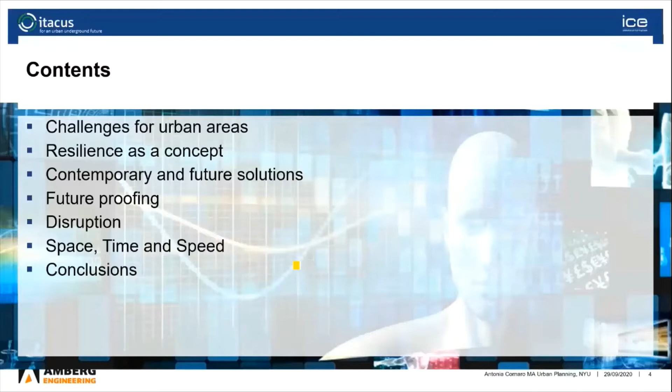Our challenges for urban areas are manifold. Growing populations and migration into cities cause an increase of threatened people in case of disasters. Increasing natural disasters and effects of climate change are really the new reality. So cities are facing challenges to get prepared. They need to deal with shocks and stresses and be able to bounce back.

Future-proofing is a concept that affects our infrastructure and how we will operate in the future. With the integration of underground spaces in cities' development plans, our cities have a chance to become more resilient, and to really avoid, reduce, or at least adapt to stresses and shocks.

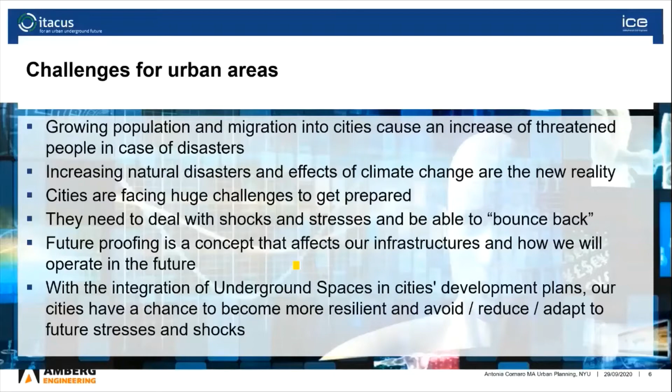So when we look at floods and heavy rainfall and its significant effects on our cities, why is that? Well, city surfaces have been hardened. We've paved them all over, as this really serves the primary purpose of our city life, namely mobility. This has a huge impact in terms of diminishing the natural infiltration of rainwater.

So, for instance, the rainwater then goes into our sewer systems, but when we have heavy rainfall, this leads to overstretching of the sewer systems and their capacities and the water treatment plants. Secondly, the lack of natural infiltration may lead to groundwater tables lowering and soils drying out.

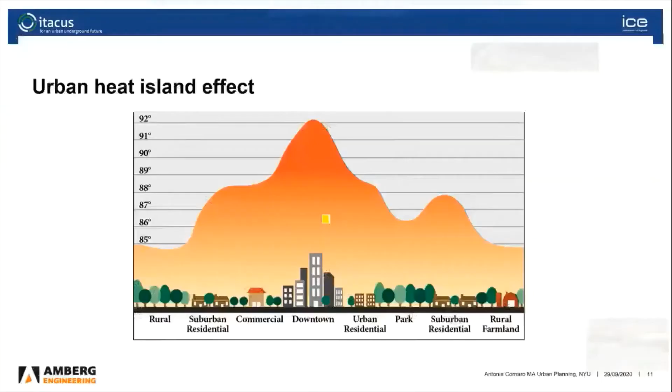So that's really the core of my presentation, that we need to consider the Sustainable Development Goal of the United Nations, which is sustainable cities and communities. How do we reach this? How do we create resilient cities? How do we create smart cities? How do we create sustainable cities? And above all, we want livable cities.

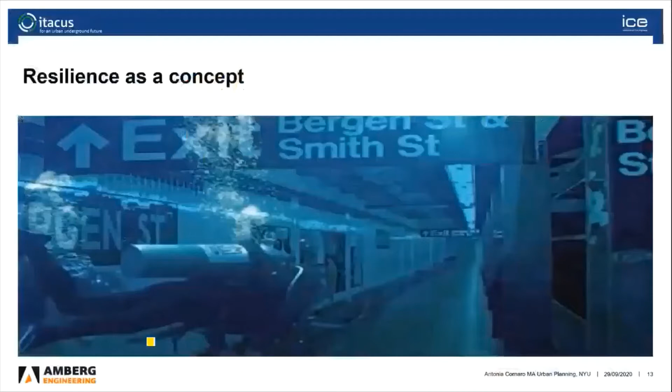So I will say a little bit about resilience as a concept. Resilience is really the capacity of individuals, communities, and systems to survive, adapt, and grow in the face of stress and shocks, and even transform when conditions require it.

So building urban resilience requires looking at a city holistically, understanding the systems that make up the city and the interdependencies and risks they may face. So at any given moment, more people than ever before are being threatened by local events like storms, rainfall, or enduring heat waves. And we need to see how we can deal with that from an urban development perspective.

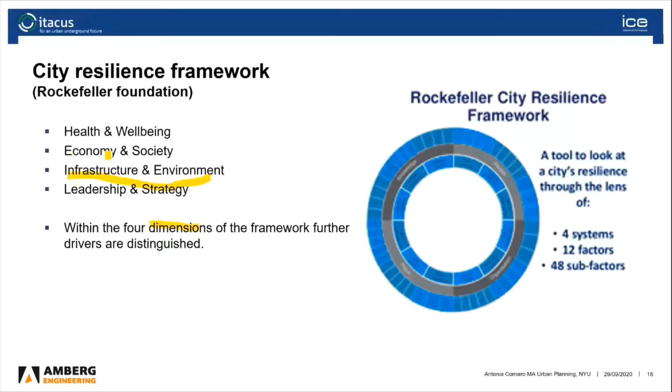So the Rockefeller Foundation has defined the city resilience framework as having four dimensions of the framework with further drivers. And we are really looking at the one on infrastructure and environment today, which affects our industry, of course, the most. But the others are also important factors in this framework.

So this is really something that can be broken down into chronic stresses and acute shocks. Chronic stresses are really slow-moving disasters that weaken the fabric of a city. And acute shocks are sudden, sharp events that threaten a city. Those are the ones we speak of in this presentation.

I just want to give some examples of how cities are dealing with getting rid of the heavy overpaving of their urban cities and transforming some urban corridors into green spaces. So this is, for instance, the Seoul city government has unveiled this plan to build a gigantic linear park on the city side of the country's oldest highway, which will be turned into an underground roadway. It will stretch almost 8 kilometers, and it's currently being designed and prepared for implementation. This will be, of course, an immense asset to the city of Seoul.

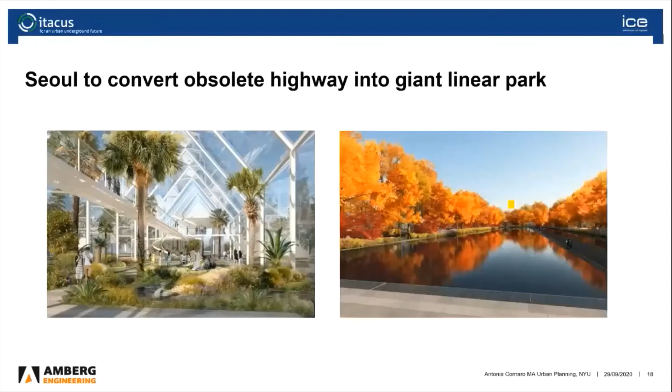We have several examples of cities that are taking down obsolete urban highway structures, like here in Seattle, the old Alaskan Way Viaduct with a double-deck roadway completely delineating the city center from the urban waterfront. And this is the situation now with the bored tunnel underneath and opening the space for greenery and pedestrians.

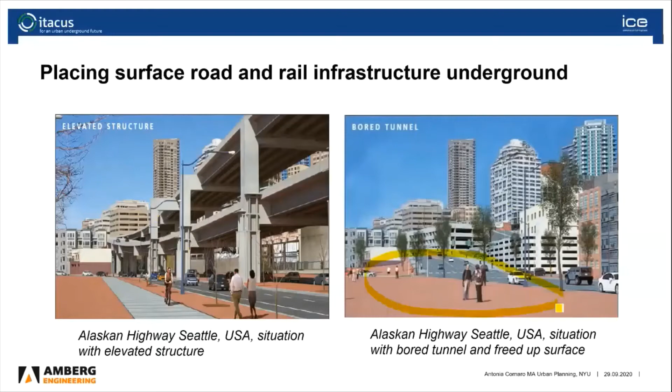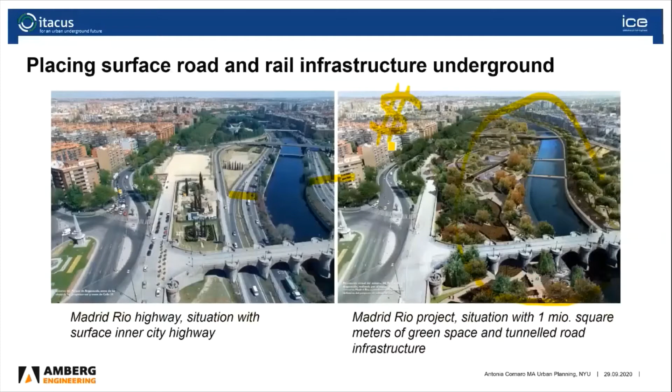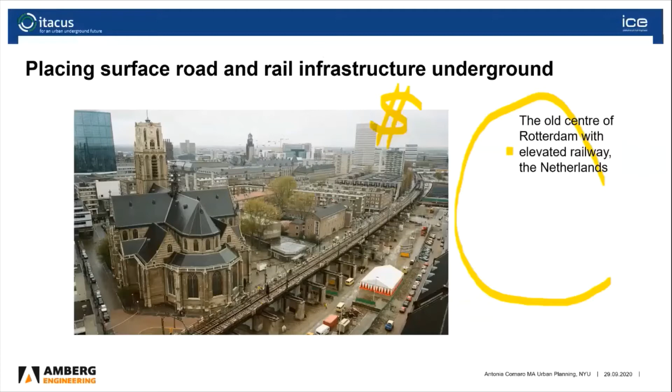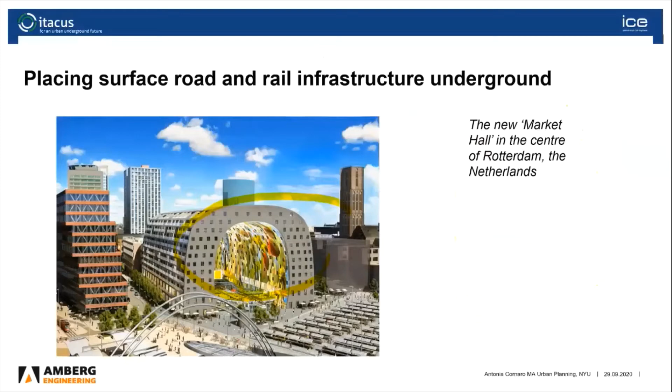So we want to say a little bit about how the subsurface can also threaten us. The subsurface can play two roles in urban resilience. The first is that of a possible stressor, so beneath the surface there could be processes acting that threaten the surface over time, for example sinkholes. A deeper knowledge of geology helps to counteract here. Secondly, the use of underground space could help alleviate some of the stresses acting on the city and play a role in urban resilience in the aftermath of an event. I will show you examples of that.

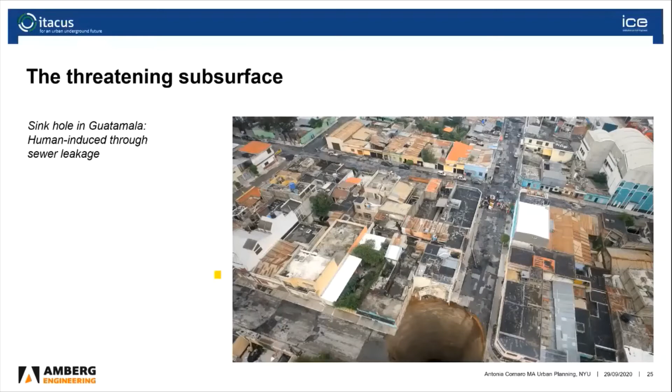This is an example of the threatening subsurface. The biggest threat of how the subsurface can be a liability for the city is earthquakes. These are natural phenomena, but human interventions can also cause artificial earthquakes, or sinkholes, often caused through the collapse of old mine galleries or shafts. Data is often not available on whether a threat exists or not. Also, when we extract resources from the subsurface, that can cause issues—for instance, in the Netherlands, artificial earthquakes were caused by gas extraction, and houses were damaged and fell down.

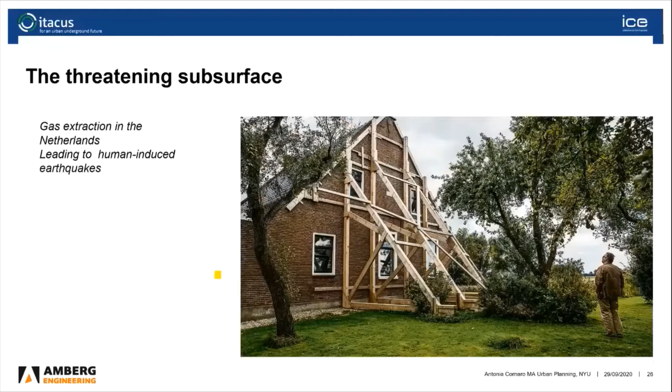The third one is contamination, brownfield contamination, which can seep into groundwater and aquifers. Processes below the surface really have a different time scale from life at the surface. It can take many years for brownfield pollution to actually reach the groundwater. Once it does, the possibility of contamination and its effect on drinking water supplies could be enormous. It is human interventions in the past that were never documented that raise concerns. Preventing those stresses from occurring, or being prepared for them, requires an extensive understanding of urban geology, human interventions, and existing physical constructions.

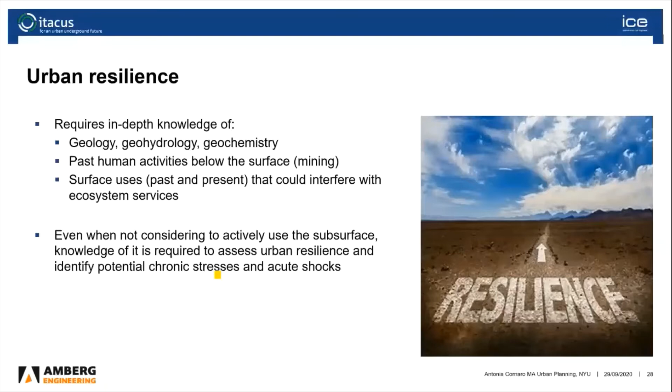So how do we meet the challenges of using underground space? You can give your opinion on the poll while I continue with my presentation.

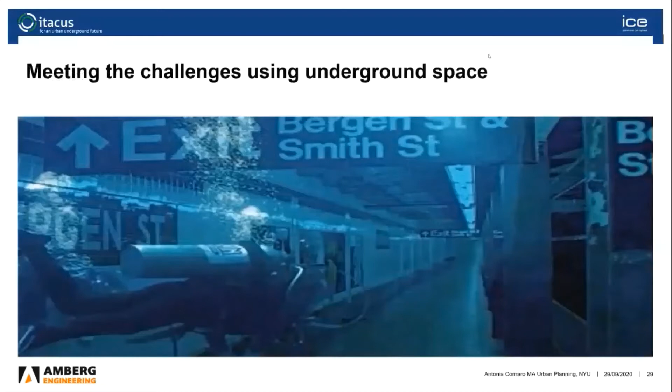For instance, in Japan, studies have already been carried out on how to utilize underground spaces and how they could protect against earthquakes, as far back as the 1930s. The enclosed properties of underground spaces provide protection against earthquakes and can be used to enhance resilience. Historically, large diameter underground tunnels have suffered less damage than surface structures during earthquakes, and this has been proven over and over. I have seen live footage myself from an earthquake in Santiago, Chile, where the metro system was only minorly shaken, whereas on the surface the earthquake was causing major destruction.

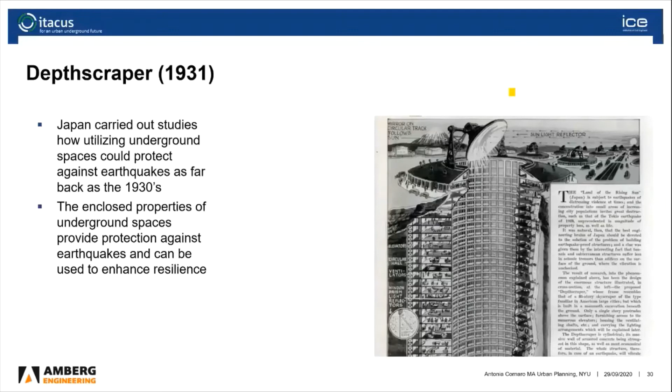So how about what the UN Office for Disaster Risk Reduction says in that sense? They say the use of underground space as part of DRR measures can involve designing large-scale underground spaces, e.g. car parks, tunnels, etc., so they can serve a variety of disaster risk reduction functions. They name, for instance, temporary water retention basins in terms of floods, or as refuges, while also providing efficient access for servicing dense urban building blocks with water, energy, or waste removal services.

And I see here some of you have already taken the poll—45% agree, 28% strongly agree with that statement, that underground space can in fact enhance resilience or provide opportunities to strengthen the city's resilience.

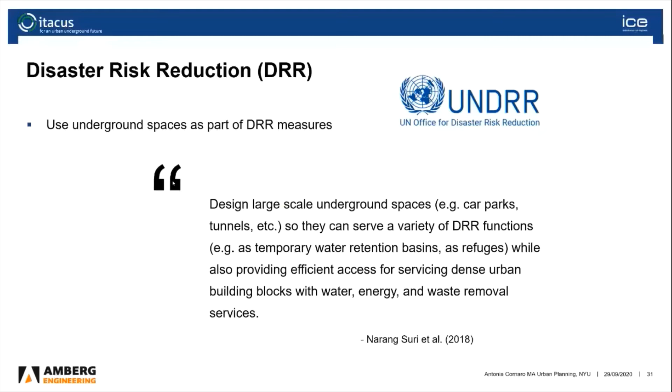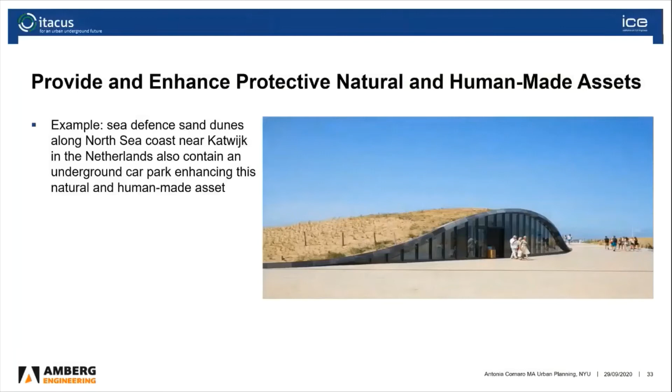We have other examples where we can enhance resilience by providing and enhancing protective natural and human-made assets. For instance, the sea defense sand dunes along the North Sea coast in the Netherlands also contain an underground car park, enhancing this natural and human-made asset. You see a picture of how that looks here.

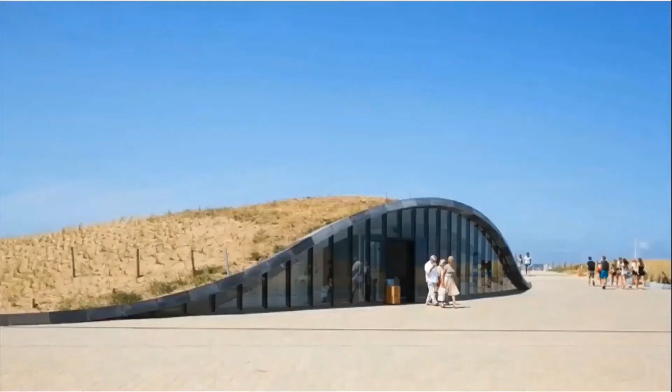The Netherlands, being a very low-lying country, has a lot of regions or land masses that actually lie below the water table. They have always had very strong sea defense structures, and the dunes are a major natural occurrence that helps them deal with water ingress in heavy storms or agitated sea times. These dunes are artificially created, but also used as underground car parks. That is really a dual function being done in a very clever way.

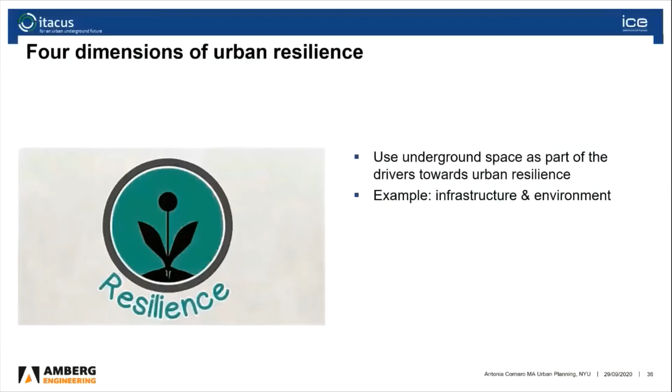So the use of underground space as part of the drivers towards urban resilience - we have seen examples in infrastructure environment. These are the three avenues this can take. I've shown examples in the first one just now with the dune. Then we can also ensure continuity of critical services, and provide reliable communication and mobility.

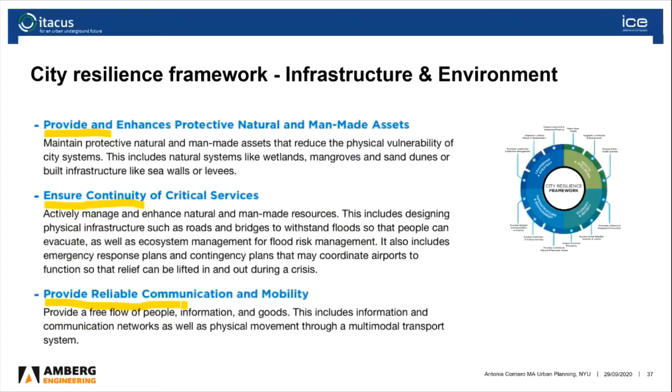So how do you ensure continuity of critical services when the threat of climate change has happened and it's more frequent, for instance highly intensive precipitation? Well, this poses a problem for cities without urban drainage. But for cities that have drainage systems, the capacity is often such that not all rainfall runoff can be dealt with, and that results in flooding.

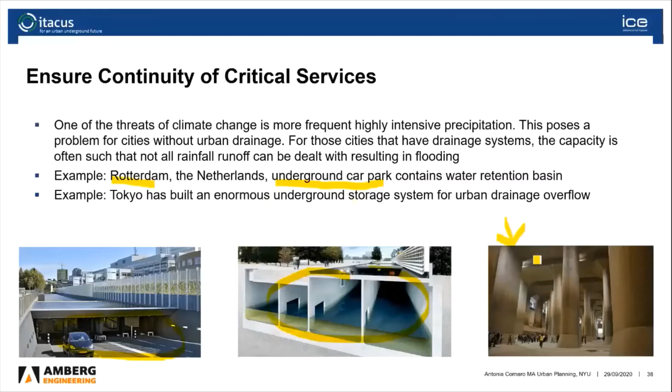How do we provide reliable communication and mobility in such times? Well, the extensive use of the subsurface for pipelines and communication cables ensures the continuity of communications and vital supplies, irrespective of the circumstances above ground. Being below the surface makes these systems independent from exogenic forces like storms.

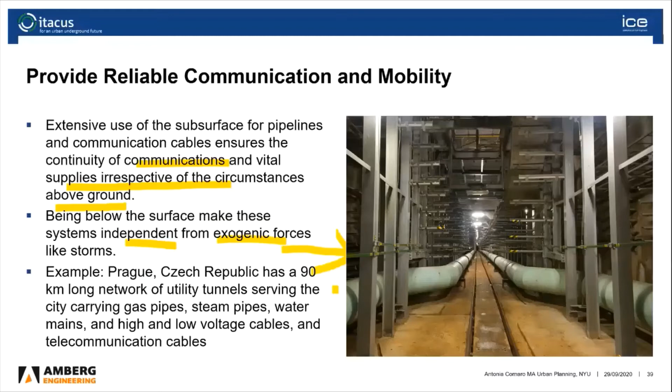Here we have an example: the city of Prague has a 90-kilometer-long network of utility tunnels serving the city, carrying gas pipes, steam pipes, water mains, and high and low voltage cables, as well as telecommunication cables. This is what that looks like. We can imagine how vital that is in a major disaster if this keeps functioning.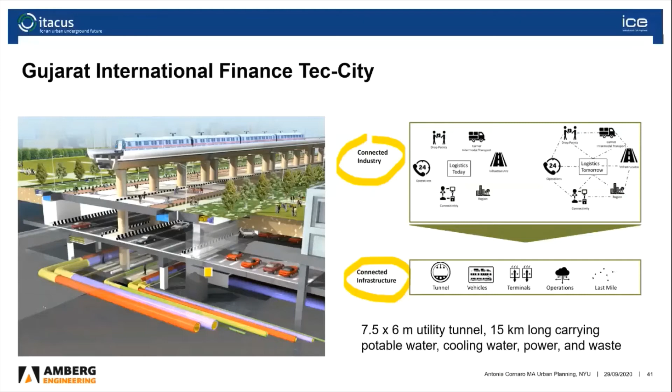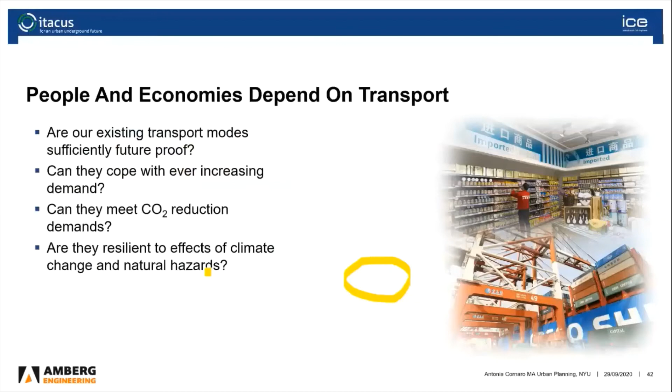So when we look at people and economies and how they depend on transport, we need to ask ourselves: are our existing transport modes sufficiently future-proof? Can they cope with ever-increasing demand? Can they meet CO2 reduction demands? And are they resilient to the effects of climate change and natural hazards?

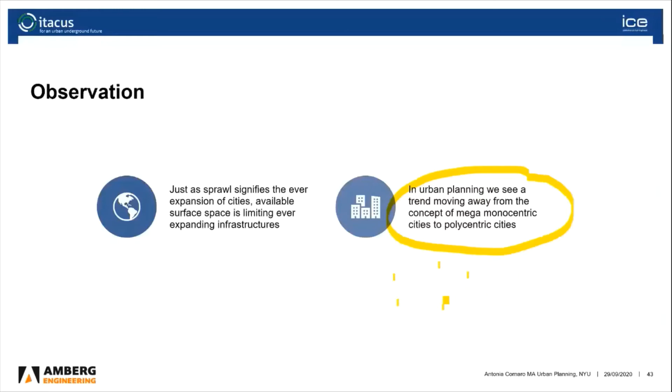Just as sprawl signifies the ever-expansion of cities, available surface space is limiting ever-expanding infrastructures. So in urban planning, we see a trend moving away from the concept of mega monocentric cities to polycentric cities - having a lot of different cities with the same kind of weight or strength, distributing resources and people rather than having it all in one major center. But no matter the current situation, there's an ever-growing demand for transport of people and goods, and I think we can all experience that.

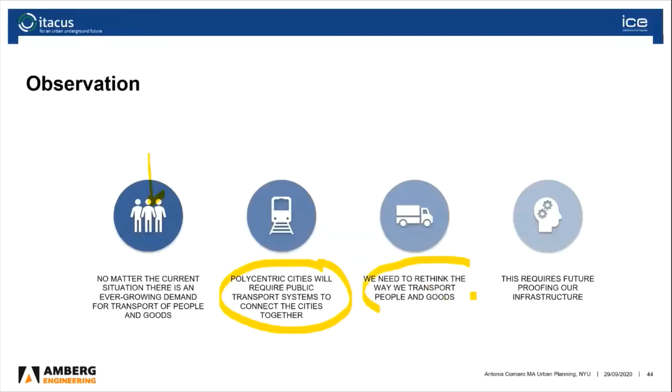Polycentric cities will require public transport systems to connect the cities together. We really need to rethink the way we transport people and goods, and this requires future-proofing of our infrastructure.

What are our contemporary solutions and how do we deal with this? Well, we always strive for more speed, so we see a big increase in high-speed rail networks all over the world. And we always strive to add more capacity - we expand our existing infrastructure and we add intelligence.

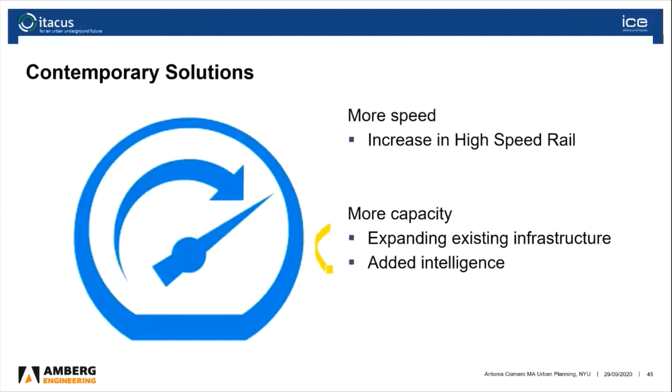Quick look at the railway map of China, showing the massive, dense, vast high-speed rail network and the bullet trains that are famous throughout that region, but also in Japan and other Southeast Asian nations. Hong Kong has major terminals serving these regions with amazing high-speed rail connections, transporting ever more people at ever higher speeds.

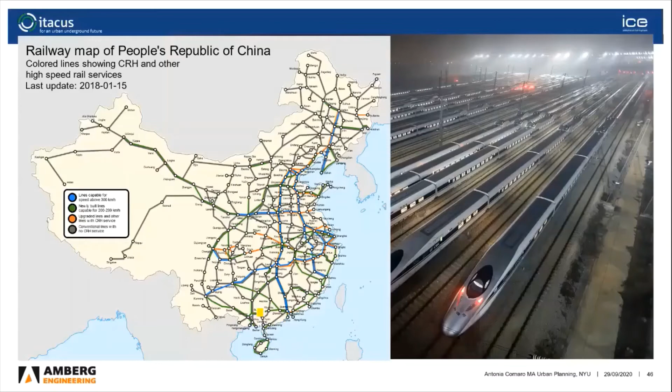In Europe there's similar networks, I would say, where, for instance, France or Spain have very advanced, fast, high-speed rail networks connecting the various polycentric centers and urban populations.

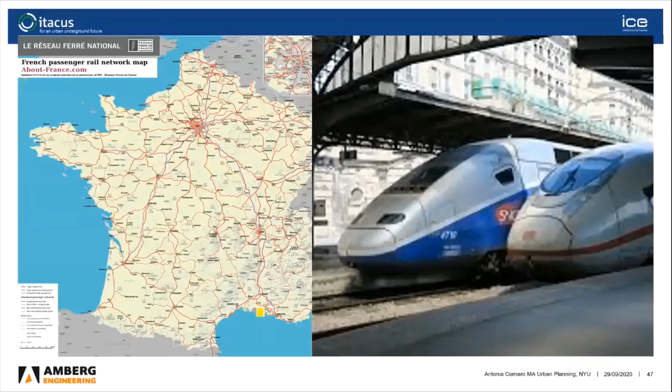But we are also looking at more capacity and additional space within our spatial boundaries in general. We're widening our road spaces to the max, and we're reducing the vertical separation minima to the max. In fact, we're doubling the capacity of airways.

I think this is a bit of an exception now with COVID-19, where we see empty skies, and we're not at full capacity at all. But in all the years leading up to now, not a slot was wasted pretty much, and the increase in air travel was constant.

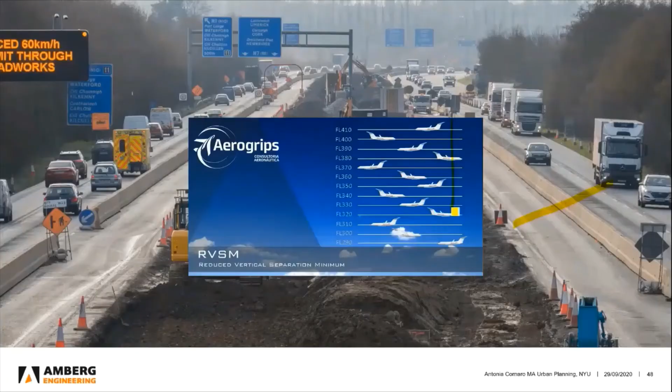But what did Albert Einstein say about solving problems? Well, we can't solve problems by using the same kind of thinking we used when we created them. We're squeezing the last drops from our infrastructures and contemporary transport modes without looking for new lemons.

What can be future solutions? Well, disruption is showing the way forward, and underground space has the expansion potential, as it is yet relatively underused. We have one contemporary system that conceptually shows us new avenues to explore and develop.

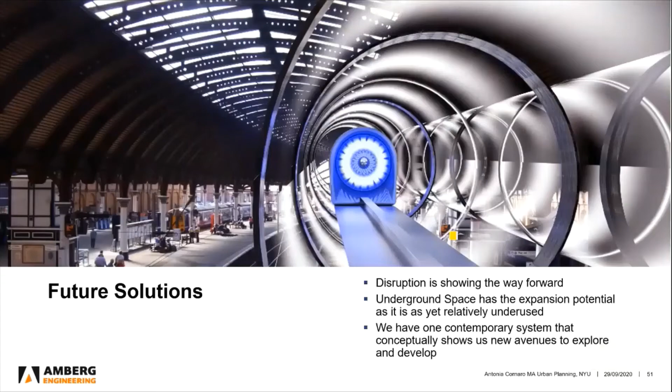When we look at, for instance, new market disruption, Uber or Tesla, there's a move away from private car ownership to shared and on-demand ownership, to electric vehicles, to automated and autonomous vehicles—meaning will we need so much parking in the future?

Hyperloop, ultra-high-speed transport of people and goods, allowing for larger regional dispersion and polycentric cities. And cargo sous terrain, the development of an underground cargo moving system in Switzerland, which I will say a few words about in a minute.

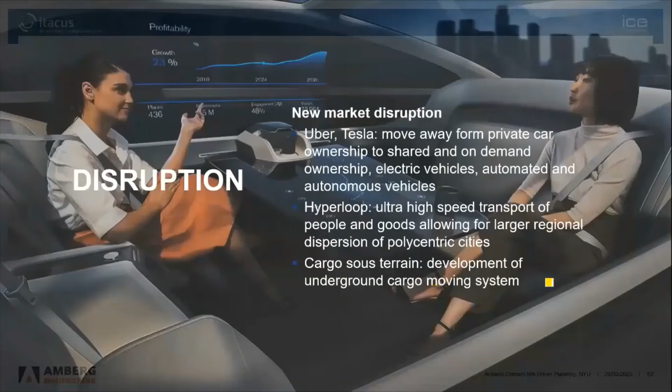So what can we say about disruption? Well, low-end disruption would be in our case that we have mixed-use systems, that we utilize the underground transport systems for both people and goods, that we don't create monostructures that only serve one purpose.

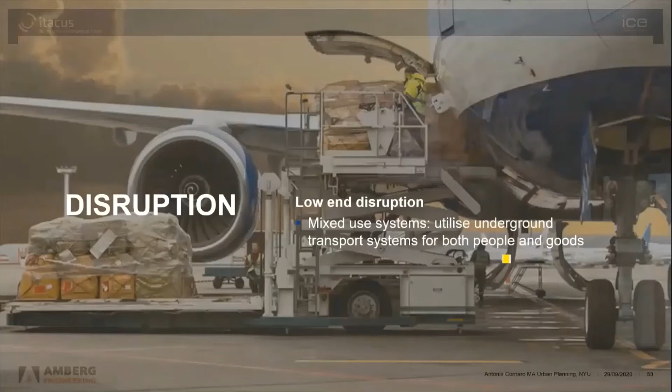So the use of underground space in terms of contemporary and future infrastructure requires space. But we are rapidly running out of surface space, and we need to keep our cities livable. We cannot use every last bit of public space for new infrastructures. Underground space offers a lot of advantages in that sense.

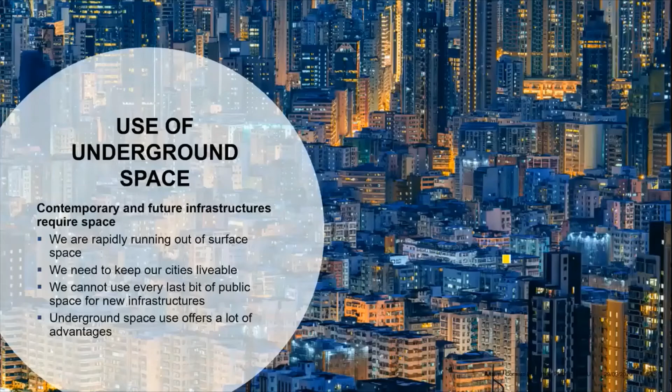It is easier to create unhindered and direct connections. It has no surface impact on communities, no environmental impact on the surface, rapid development of a new layer of supplemental infrastructure is possible, and it allows new combinations that serve the modern needs of the city and combine disruptive developments.

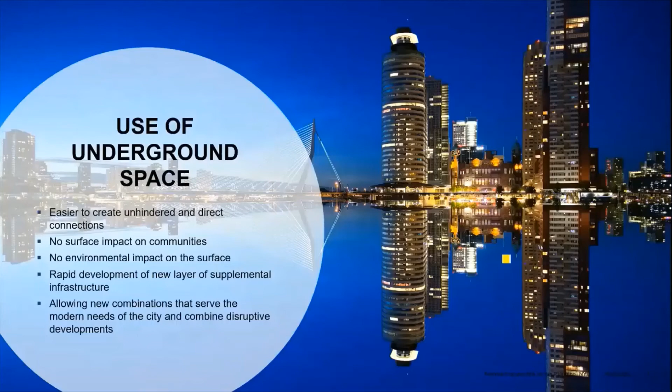So new systems will not replace the old systems. That is my observation. There will be no cutoff, no immediate transition. Old and new will need to exist next to each other. New systems will supplement at first and replace later. And this requires additional space in already densely populated urban areas.

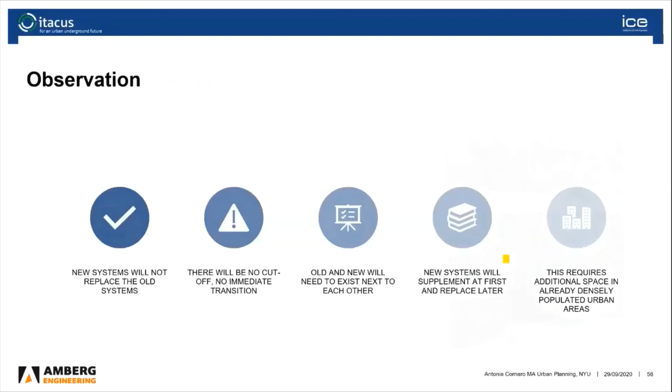Let's look at the tunnel concepts. I believe many of you might be from the industry where we design and manage and construct underground structures. Tunnels have a long history. They come in all shapes and sizes. They have been traditionally created for transport, for sewers, and for pipelines. Usually they have one thing in common: they are mono-use.

But what if we could harness the tunnel concept and future-proof it? The power of what if? What if we could come up with a mixed-use tunnel concept rather than the mono-use contemporary use?

And you're now being asked the second polling question: do you think it is likely that more tunnel systems will be multi-use in the future, and thereby contributing to a smart and sustainable city? See, I can vote as well, that's fun.

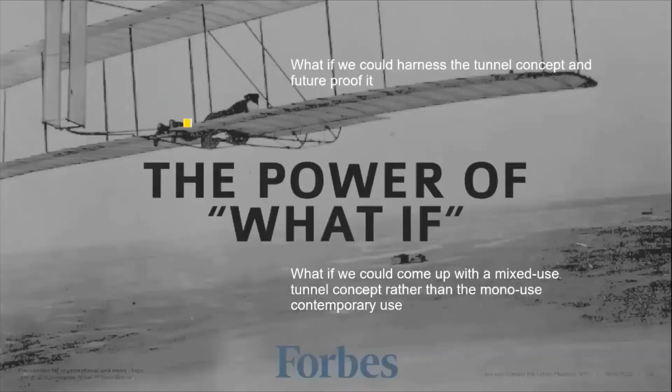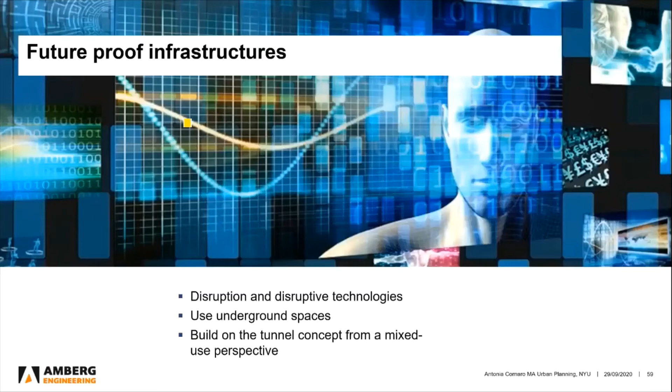And I carry on talking about future-proof infrastructures—disruption and disruptive technologies, the use of underground spaces, and building on the tunnel concept from a mixed-use perspective. For instance, in our book, we deal with that in chapter 10, how disruption is creating new paradigms for an urban underground future. Space, time, and speed, all three are of essence if we are to achieve the much needed disruptions and paradigm shifts that will challenge our conception of where we live, where we work, and how we travel.

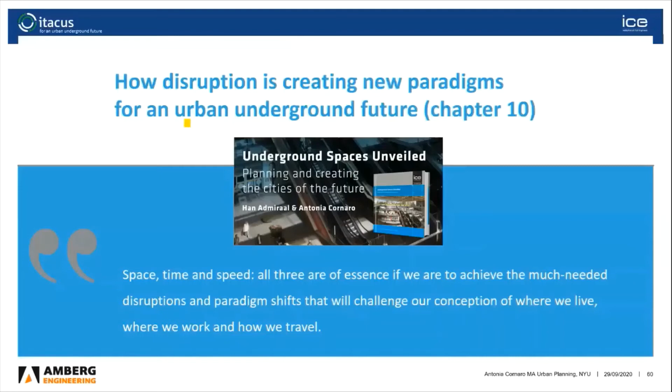And I would say disruption is here to stay. What is disruption? Well, this graph shows it very well. Innovation is doing the same things a little bit better. Then we do new things. And then we have disruption, making things that make the old things obsolete eventually.

And I see you have been polling here. 35% of you think it's very likely that this will happen, and 33% think it's likely. You're still submitting your choices. There's also 10% of you who think it's unlikely that we will use the underground structures for multi-use purposes.

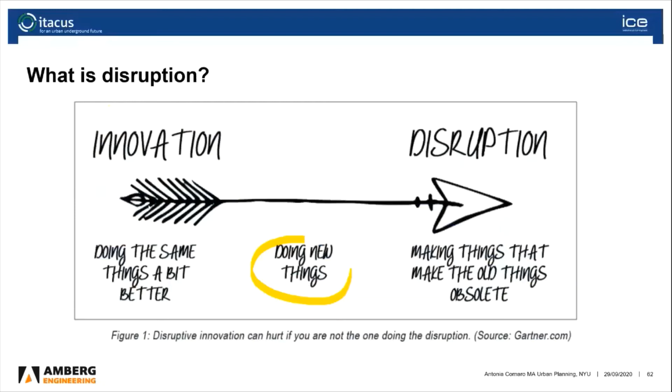Examples of disruptions are, for instance, PayPal challenging banks, Apple credit cards challenging existing credit card companies, Uber challenging the taxi business, Airbnb challenging the hotel business, Hyperloop challenging contemporary transport, and mobility as a service challenging private car ownership. The victims here are really the established companies, caught like rabbits in the headlights of the aggregator companies. Aggregators use new technologies to shift to a new paradigm on accommodation, for instance, or mobility, which is our core topic. The aggregators are disruptive, and the disruption itself is causing a transition to what will inevitably become the new normal.

So disruptions hurt and challenge the common way of doing things, and new paradigms will come into existence through disruption that shape the way forward to the future.

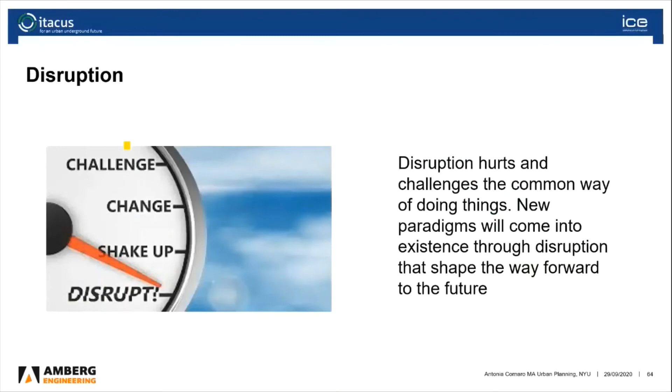How do we bridge space, time, and speed in the future? Can we look at urban density through satellite cities? Well, two-thirds of the population will live in cities by 2050. That's a staggering number. Most of these cities are in coastal regions prone to permanent flooding due to climate change. Can we halt the migration to cities by creating density through connected satellite cities in what are now emptying rural areas? What if we could travel 1,200 kilometers a day in 60 minutes?

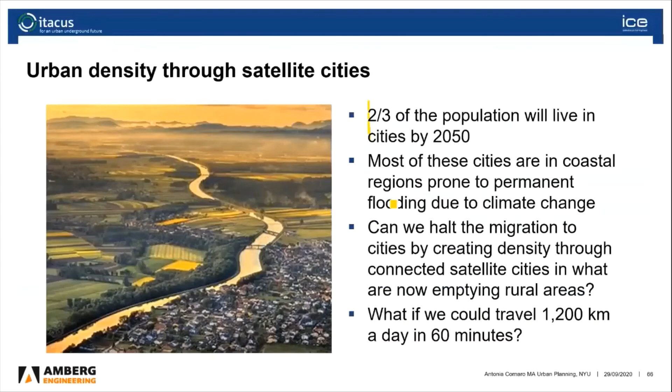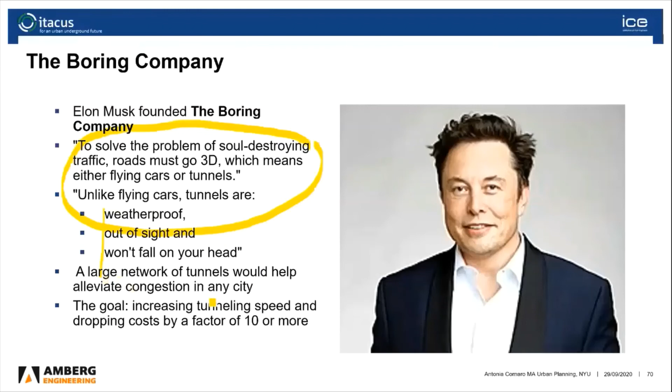And what he said is, to solve the problem of soul-destroying traffic, roads must go 3D, which means either flying cars or tunnels. But he says, unlike flying cars, tunnels are weatherproof, out of sight, and won't fall on your head. And here he has his testing facility in California, and he's currently testing having the Tesla be brought down into a tunnel system. He's also developing a mass rapid transit system for the city of Chicago to connect the city center to its airport, and also in Las Vegas to connect people around underground.

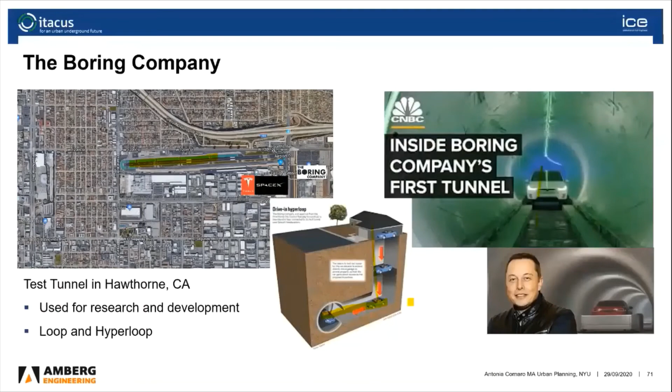And he's really challenging the way we construct tunnels conventionally and how much time it takes and also how much it costs. And he wants to find new ways to make it faster and cheaper. He also has started the Hyperloop challenge with many student teams around the world working on developing and designing the perfect pod, because this is what is so difficult if we are not safe, secure, and comfortable in being shot around as humans in these pods.

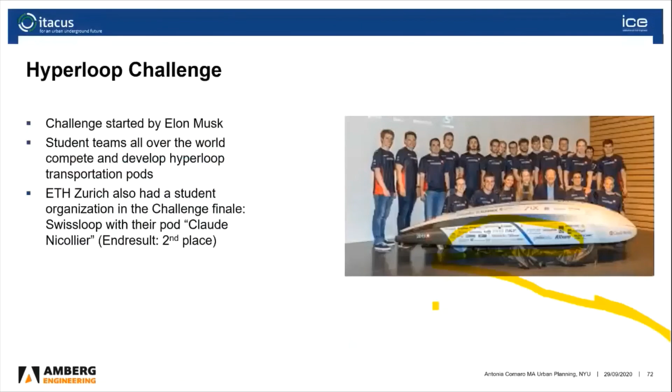We can also look at large connecting tunnel schemes being planned all over the world, which are becoming longer and deeper. So for instance, we've worked on the binational feasibility study for a 100-kilometer-long undersea tunnel for passengers and cargo to connect Helsinki and Tallinn, which is really viewed as one economic region and is currently only connected by relatively slow ferry traffic.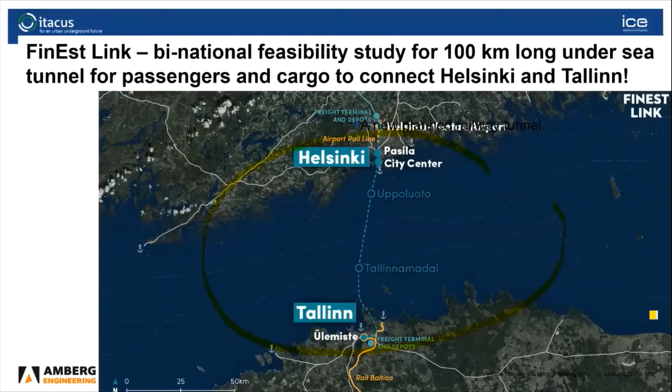And here's the Disruptor. He's a multimillionaire Finnish mobile game developer who invented Angry Birds, and he says, this is the European Silicon Valley. We cannot go the conventional ways. It takes too much time. He's trying to raise funds to compete with the government schemes to develop this major corridor tunnel concept.

But also we need to look at future-proofing and disruption and resilience in terms of how we will feed our future populations. And here we, for instance, have examples of how can we grow food in a protected environment close to city centers, requiring less water and no pesticides. This is, for instance, an example from SCAUT, the Swiss Center of Applied Underground Technologies, which is working on a proof of concept in the Hagerbach test gallery underground in Switzerland to show closed loop systems raising trout and greenery and salads and food in an underground system, because this will also be a major issue in the future, how to feed our urban population and how to feed them with good organic food and in an environmentally conscious way.

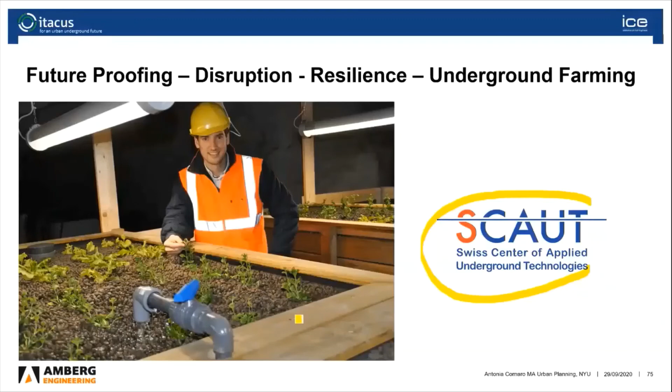But also let's have a quick look at overcoming logistic bottlenecks. And this is a quite smart scheme, I would say, also developed in Switzerland, Cargo Sous Terrain. Here you see the whole network that is being planned, an underground transportation system connecting major urban centers in Switzerland.

It will start in 2030, and it is purely funded by private funds, which is very interesting. The orange one is the first major leg that will be developed. It's really bringing down cargo to the underground and having it in automated little vehicles. It can also combine goods transport with data transport and pipeline transport.

That's why I'm bringing this example. The tunnel provides a multi-use utility and transport corridor. It's a sustainable and resilient system. Minimal surface-based pressure is needed, and it enhances disruptive technologies such as automated and autonomous vehicles.

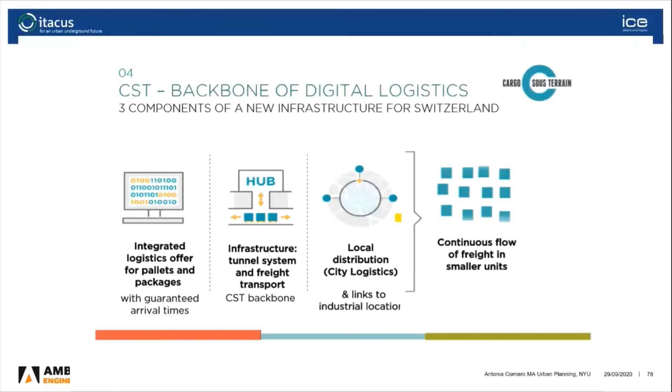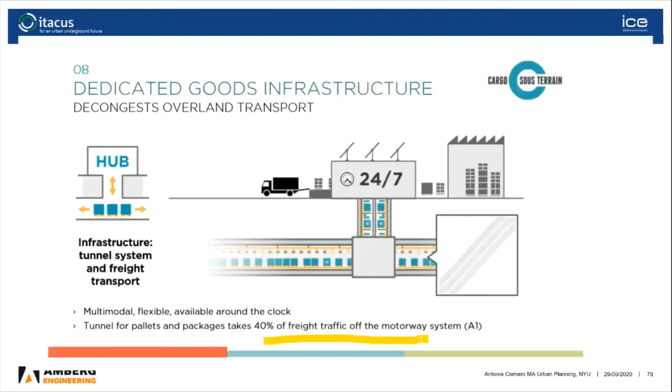It has it all worked out all the way to the final mile delivery, how it's going to work. I don't have time to go into detail, but it has a dedicated website you can look up. It's dedicated goods infrastructure, decongesting overland transport, working 24/7, multimodal, flexible, available around the clock, and it will take 40% of freight traffic off the motorway system.

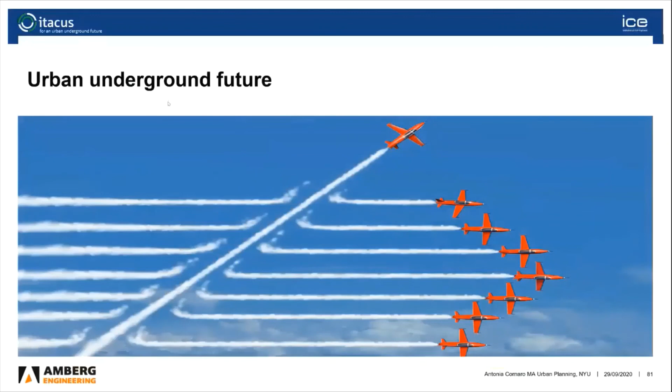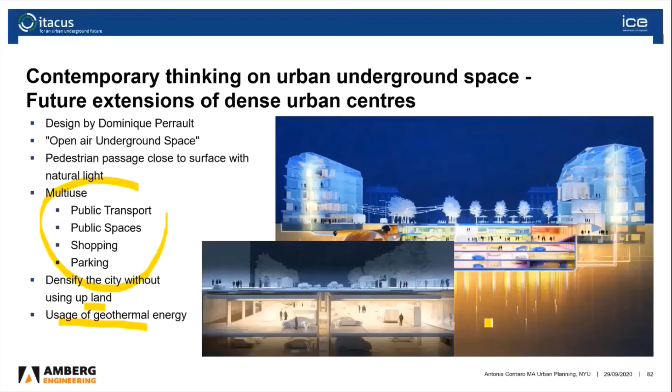Contemporary thinking on urban underground space and future extensions of dense urban centres looks like this, where we really have open air underground space. We're opening up the underground. We create pedestrian passages close to the surface with natural light. We apply the concept of multi-use: public transport, public spaces, shopping, parking, densifying the city without using up precious land on top. And we use geothermal energy as well to have energy efficient concepts in place. This is what the scheme looks like.

But also we must never forget we build for people, and we should create valued underground spaces. There are many very good examples of that, where I don't have time to go into it at the moment, but you see some pictures where we really create beautiful additions to our urban cores.

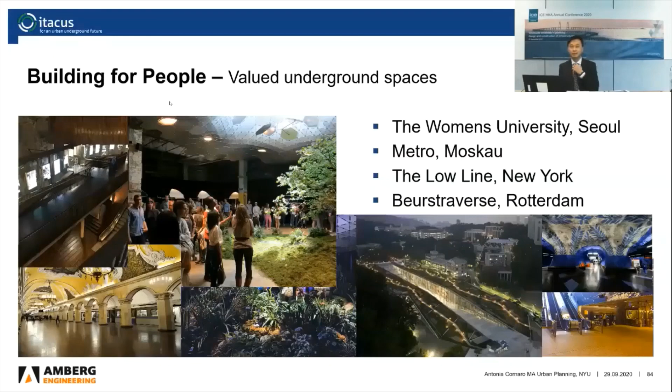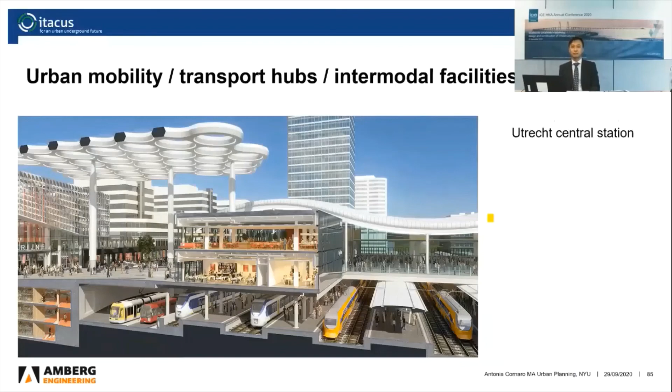So we're creating more and more urban mobility transport hubs, intermodal facilities. This is, for instance, the Utrecht Central Station, but I'm also thinking of Kowloon in Hong Kong, which is, to me, an amazing example of how you can open up the space, how you can really accommodate so many modes and create a pleasant park space on top.

In conclusion, we need to start thinking disruptively and move away from a strategy of ever expanding what we have been doing for ages. Underground space offers an opportunity to develop supplemental infrastructure systems that can eventually replace contemporary systems. An additional advantage is freeing up surface space to maintain the livability of our cities.

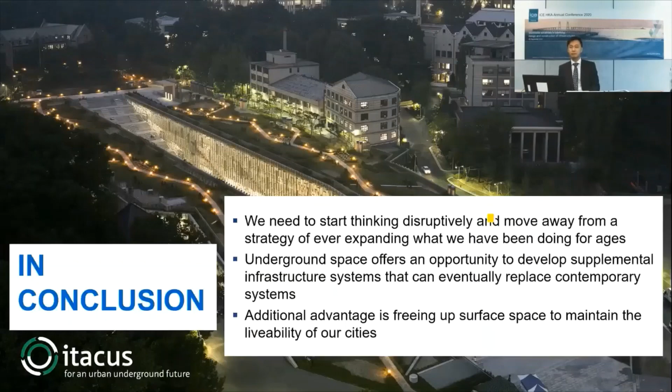The relationship between urban resilience and the subsurface needs to be assessed in terms of the threats it could hold, but also the opportunities to enhance urban resilience through shelter, water retention, emergency food storage, vital communication lines, etc. Balancing urban development above, at, and below the surface is the key for future development, in my opinion.

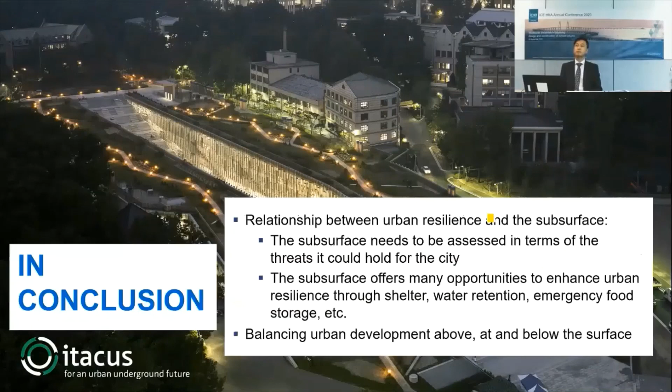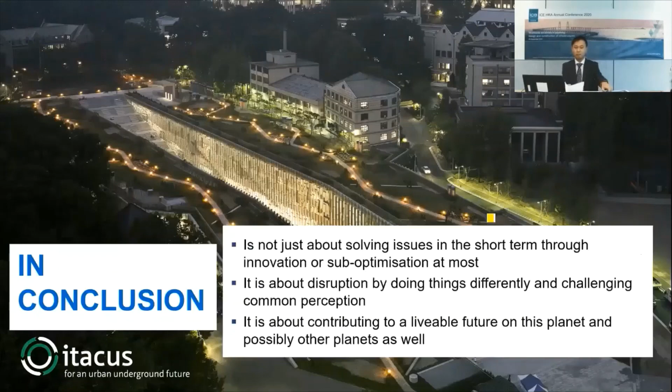It is not just about solving issues in the short term through innovation or sub-optimization. It is about disruption by doing things differently and challenging common perception, like I've shown you. It is about contributing to a livable future on this planet, and possibly other planets as well. So underground space offers as yet untapped potential. Through disruption, these potentials can be unlocked. It will require imagination, adapting legislation, and developing more advanced and faster technologies.

But why would an urban underground future be less disruptive than PayPal, Uber, Airbnb, and Hyperloop already are? The future is out there. A large part of that future is still below the surface. Our job is to unveil what is hidden and to use it for smart and sustainable city development by creating connectivity and combining uses.